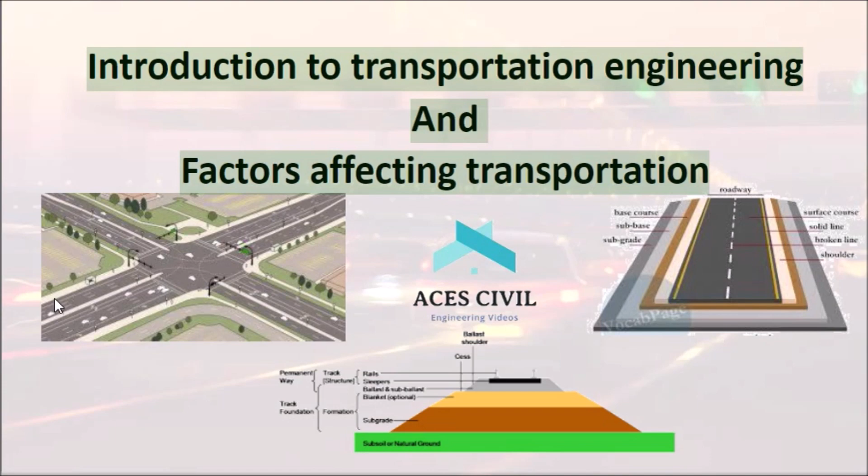Transportation plays a major role in the development of human civilization. For instance, one could easily observe the strong correlation between the evolution of human settlement and the proximity of transport facilities.

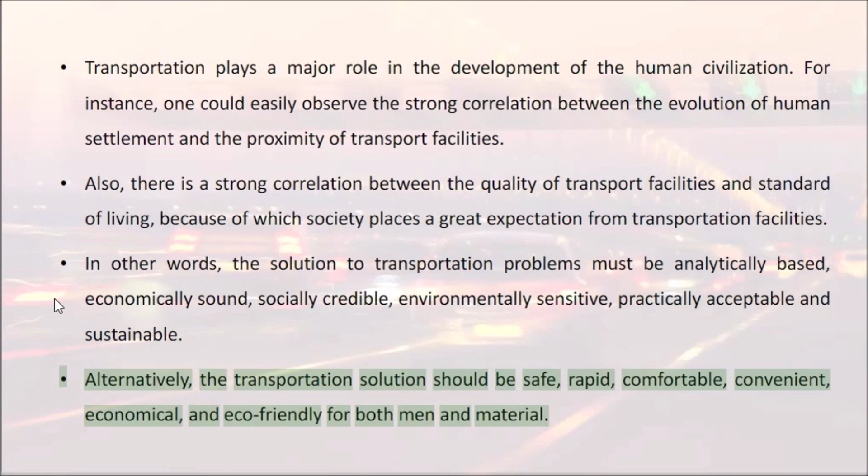Also, there is a strong correlation between the quality of transport facilities and standard of living, because of which society places great expectations from transportation facilities. In other words, the solution to transportation problems must be analytically based, economically sound, socially credible, environmentally sensitive, practically acceptable, and sustainable. Alternatively, the transportation solution should be safe, rapid, comfortable, convenient, economical, and eco-friendly for both men and material.

Transportation system: in the last couple of decades, transportation systems analysis has emerged as a recognized profession. More and more government organizations, universities, researchers, consultants, and private industrial groups around the world are becoming truly multimodal in their orientation and are adopting a systematic approach to transportation problems.

Diverse characteristics. The characteristics of transportation system that make it diverse and complex are listed below. Multimodal: covering all modes of transport - air, land, and sea - for both passenger and freight.

Multi-sector, encompassing the problems and viewpoints of government, private industry, and public. Multi-problem, ranging across a spectrum of issues that includes national and international policy, planning of regional system, the location and design of specific facilities, carrier management issues, regulatory, institutional and financial policies.

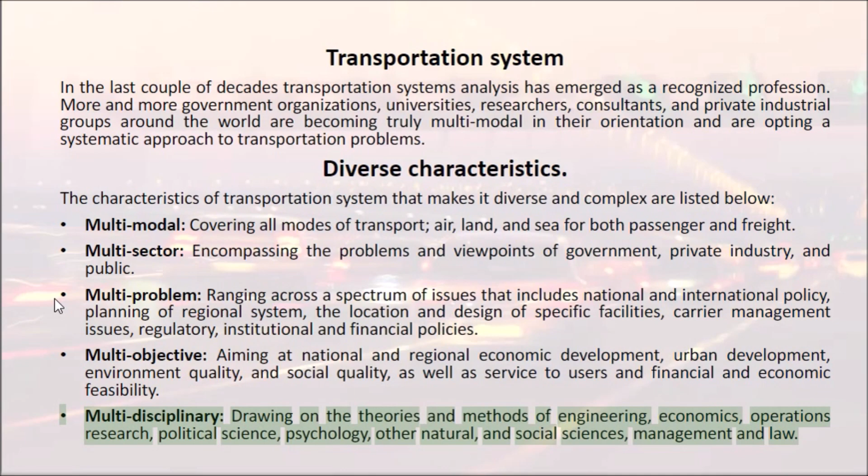Role of transportation engineer. In spite of the diversity of problem types, institutional contexts, and technical perspectives, there is an underlying unity, a body of theory and set of basic principles to be utilized in every analysis of transportation systems. The core of this is the transportation system analysis approach.

The focus of this is the interaction between the transportation and activity systems of a region. This approach is to intervene, delicately and deliberately, in the complex fabric of society to use transport effectively in coordination with other public and private actions to achieve the goals of that society.

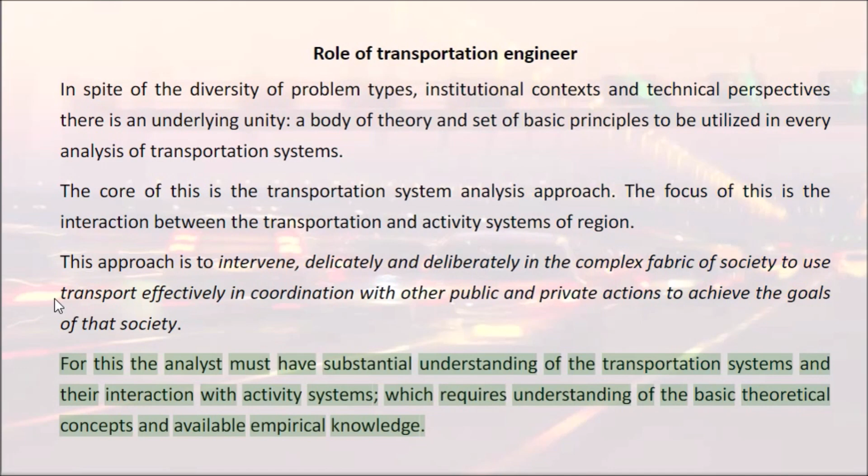For this, the analyst must have substantial understanding of the transportation systems and their interaction with activity systems, which requires understanding of the basic theoretical concepts and available empirical knowledge.

Major disciplines of transportation. Transportation engineering can be broadly divided into four major parts: transportation planning, geometric design, pavement design, and traffic engineering. A brief overview of the topics is given below.

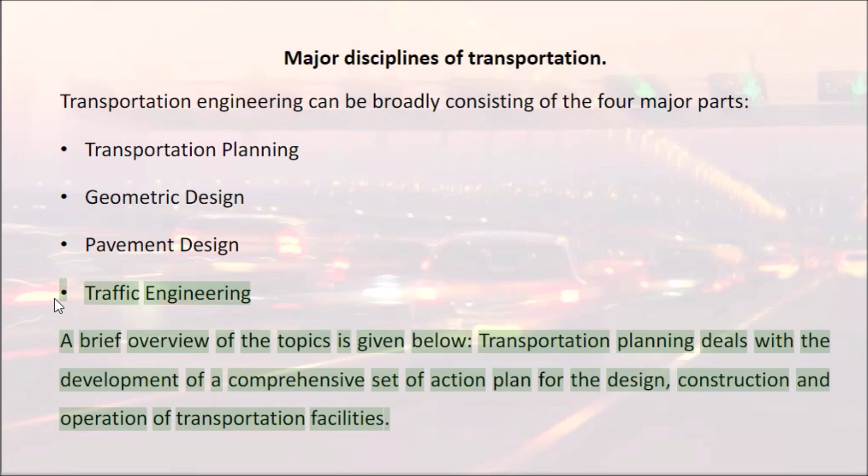Transportation planning deals with the development of a comprehensive set of action plans for the design, construction, and operation of transportation facilities. Transportation planning essentially involves the development of a transport model which will accurately represent both the current as well as future transportation system.

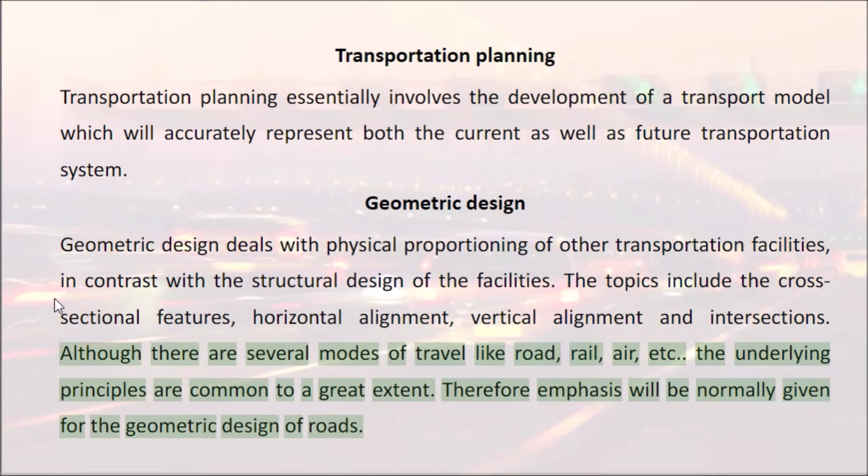Geometric design deals with physical proportioning of transportation facilities, in contrast with the structural design of the facilities. The topics include the cross-sectional features, horizontal alignment, vertical alignment, and intersections. Although there are several modes of travel like road, rail, air, etc., the underlying principles are common to a great extent. Therefore, emphasis will normally be given to the geometric design of roads.

Pavement analysis and design. Pavement design deals with the structural design of roads, both bituminous and concrete, commonly known as flexible pavements and rigid pavements, respectively. It deals with the design of paving materials, determination of the layer thickness, and construction and maintenance procedures.

The design mainly covers structural aspects, functional aspects, and drainage. Structural design ensures the pavement has enough strength to withstand the impact of loads. Functional design emphasizes the riding quality, and the drainage design protects the pavement from damage due to water infiltration.

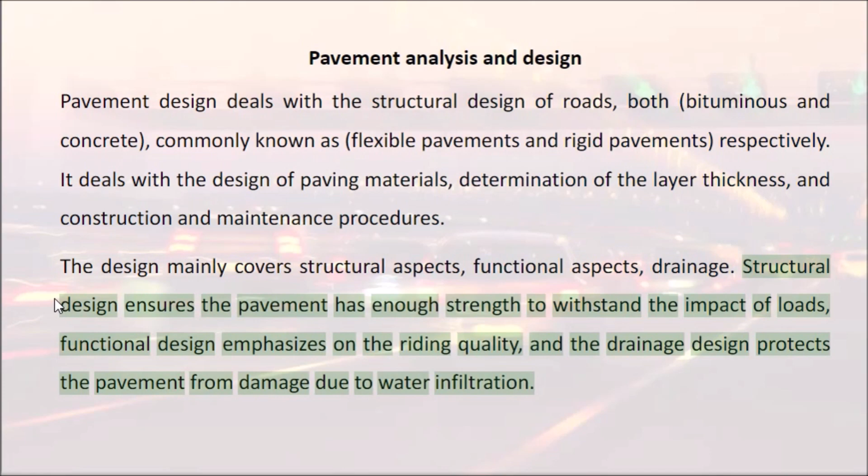Traffic engineering covers a broad range of engineering applications with a focus on the safety of the public, the efficient use of transportation resources, and the mobility of people and goods. Traffic engineering involves a variety of engineering and management skills, including design, operation, and system optimization.

In order to address the above requirement, the traffic engineer must first understand the traffic flow behavior and characteristics by extensive collection of traffic flow data and analysis. Based on this analysis, traffic flow is controlled so that the transport infrastructure is used optimally as well as with good service quality.

In short, the role of traffic engineer is to protect the environment while providing mobility, to preserve scarce resources while assuring economic activity, and to assure safety and security to people and vehicles, through both acceptable practices and high-tech communications.

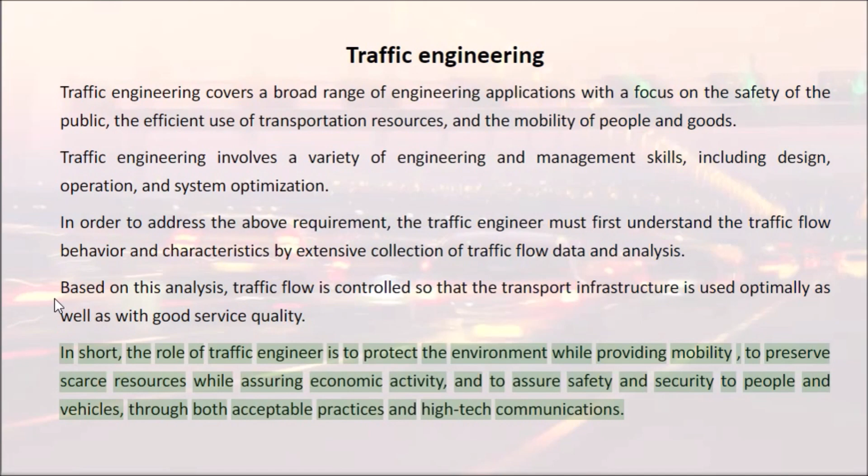Other important disciplines. In addition to the four major disciplines of transportation, there are several other important disciplines that are being evolved in the past few decades. Although it is difficult to categorize them into separate well-defined disciplines because of the significant overlap, it may be worth the effort to highlight the importance given by the transportation community. They can be enumerated as below.

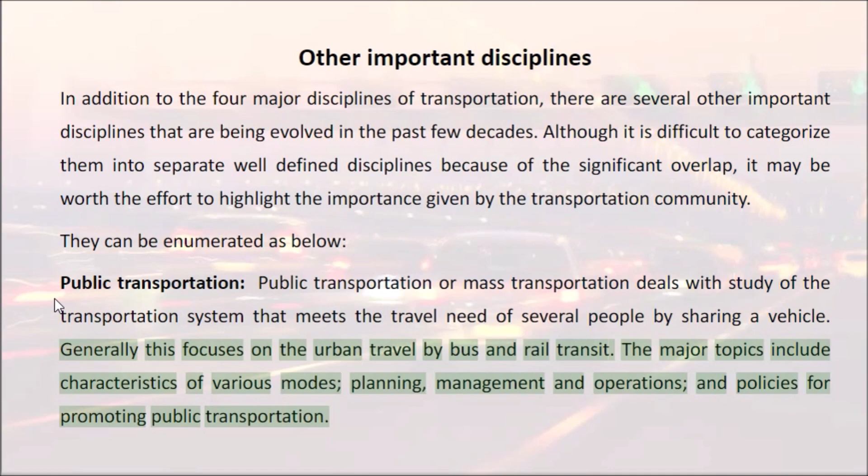Public transportation. Public transportation or mass transportation deals with the study of the transportation system that meets the travel need of several people by sharing a vehicle. Generally, this focuses on urban travel by bus and rail transit. The major topics include characteristics of various modes, planning, management, and operations, and policies for promoting public transportation.

Financial and economic analysis. Transportation facilities require large capital investments. Therefore, it is imperative that whoever invests money should get the returns. When government invests in transportation, its objective is often not monetary returns, but social benefits. The economic analysis of transportation projects tries to quantify the economic benefit, which includes saving in travel time, fuel consumption, etc. This will help the planner in evaluating various projects and to optimally allocate funds.

On the contrary, private sector investments require monetary profits from the projects. Financial evaluation tries to quantify the return from a project.

Environmental impact assessment. The depletion of fossil fuels and the degradation of the environment has been a severe concern of planners in the past few decades. Transportation, in spite of its benefits to society, is a major contributor to the above concern. The environmental impact assessment attempts in quantifying the environmental impacts and tries to evolve strategies for the mitigation and reduction of the impact due to both construction and operation. The primary impacts are fuel consumption, air pollution, and noise pollution.

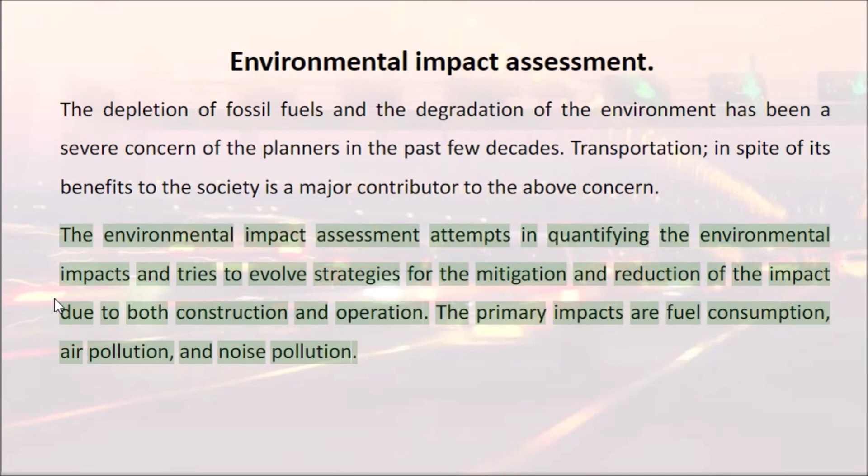Accident analysis and reduction. One of the silent killers of humanity is transportation. Several statistics evaluate that more people are killed due to transportation than great wars and natural disasters. This discipline of transportation looks at the causes of accidents, from the perspective of human, road, and vehicle, and formulates plans for the reduction.

Intelligent transport system. With the advent of computers, communication, and vehicle technology, it is possible in these days to operate transportation systems much more effectively with significant reduction in the adverse impacts of transportation. Intelligent transportation systems offer better mobility, efficiency, and safety with the help of state-of-the-art technology.

In addition, disciplines specific to various modes are also common. This includes railway engineering, port and harbor engineering, and airport engineering.

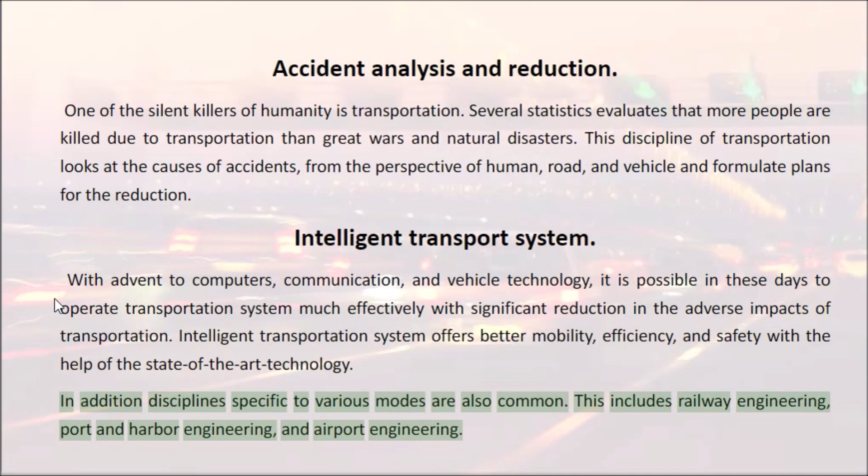Highway planning in India. Excavations at the sites of Indus Valley, Mohenjo-Daro, and Harappan civilizations revealed the existence of planned roads in India as old as 2500 to 3500 BC. The Mauryan kings also built very good roads. Ancient books like Arthashastra, written by Kautilya, a great administrator of the Mauryan times, contained rules for regulating traffic, depths of roads for various purposes, and punishments for obstructing traffic.

During the time of the Mughal period, roads in India were greatly improved. Roads linking northwest and eastern areas through the Gangetic plains were built during this time. After the fall of the Mughals and at the beginning of British rule, many existing roads were improved. The construction of the Grand Trunk Road connecting north and south is a major contribution of the British. However, the focus was later shifted to railways, except for feeder roads to important stations.

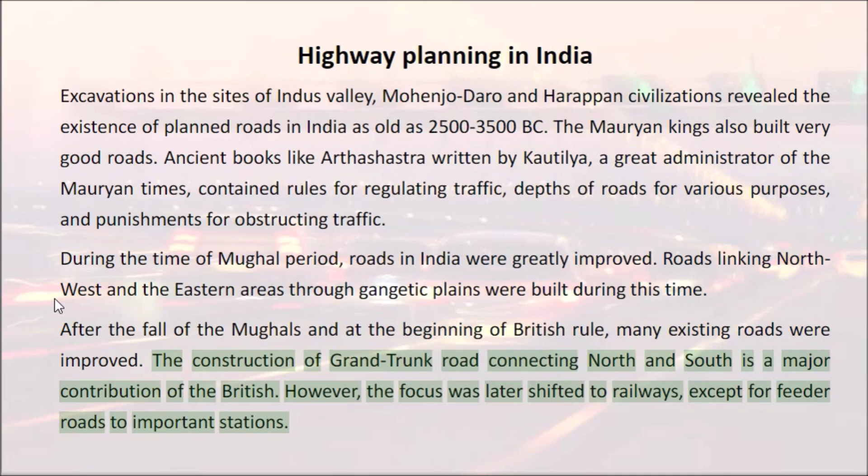Modern developments. The First World War period and that immediately following it found a rapid growth in motor transport. So the need for better roads became a necessity. For that, the Government of India appointed a committee called the Road Development Committee with Mr. M.R. Jayakar as the chairman. This committee came to be known as the Jayakar Committee.

In 1927, the Jayakar Committee for Indian Road Development was appointed. The major recommendations and the resulting implementations were: the committee found that the road development of the country has become beyond the capacity of local governments and suggested that the central government should take proper charge, considering it as a matter of national interest.

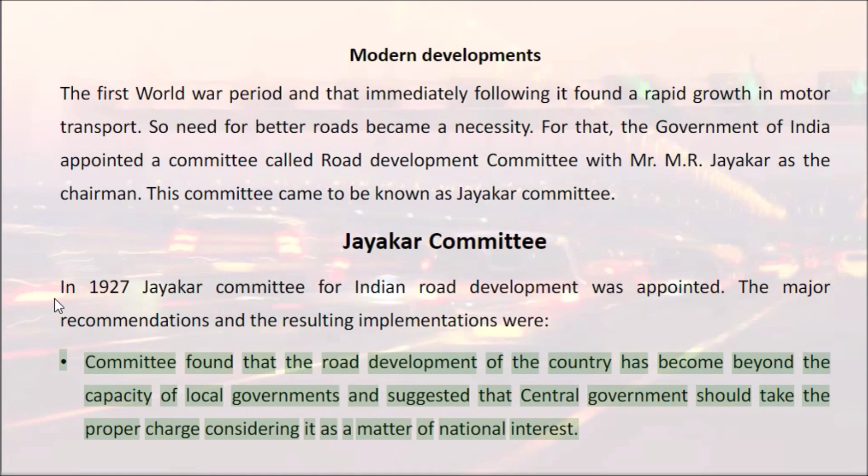They gave more stress on long-term planning, a program for a period of 20 years, hence called the 20-year plan - to formulate plans and implement those plans within the next 20 years.

One of the recommendations was the holding of periodic road conferences to discuss road construction and development. This paved the way for the establishment of a semi-official technical body called the Indian Road Congress, IRC, in 1934.

The committee suggested imposition of additional taxation on motor transport, which includes duty on motor spirit, vehicle taxation, and license fees for vehicles plying for hire. This led to the introduction of a development fund called the Central Road Fund in 1929. This fund was intended for road development.

A dedicated research organization should be constituted to carry out research and development work. This resulted in the formation of the Central Road Research Institute, CRRI, in 1950.

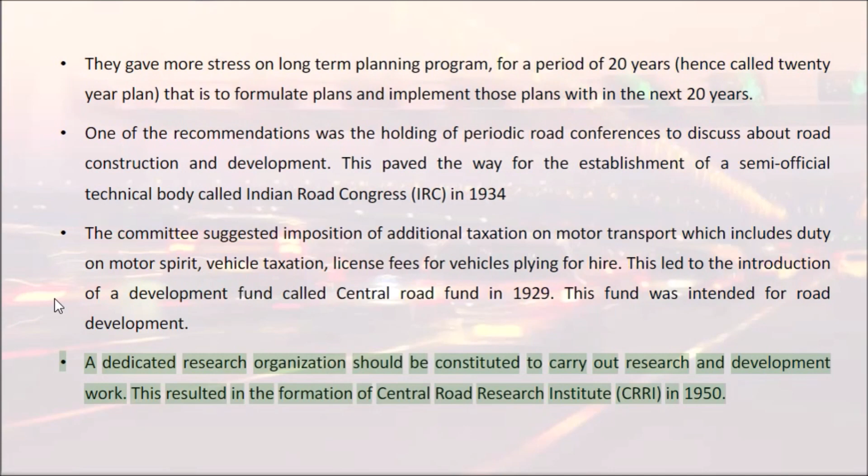Nagpur Road Congress 1943. The Second World War saw a rapid growth in road traffic, and this led to deterioration in the condition of roads. To discuss improving the condition of roads, the government convened a conference of chief engineers of provinces at Nagpur in 1943. The result of the conference is famously known as the Nagpur Plan.

A 20-year development program for the period 1943 to 1963 was finalized. It was the first attempt to prepare a coordinated road development program in a planned manner. The roads were divided into 4 classes.

National highways, which would pass through states and places having national importance for strategic, administrative, and other purposes. State highways, which would be the other main roads of a state.

District roads, which would take traffic from the main roads to the interior of the district - according to importance, some are considered major district roads and the remaining as other district roads. Village roads, which would link the villages to the road system.

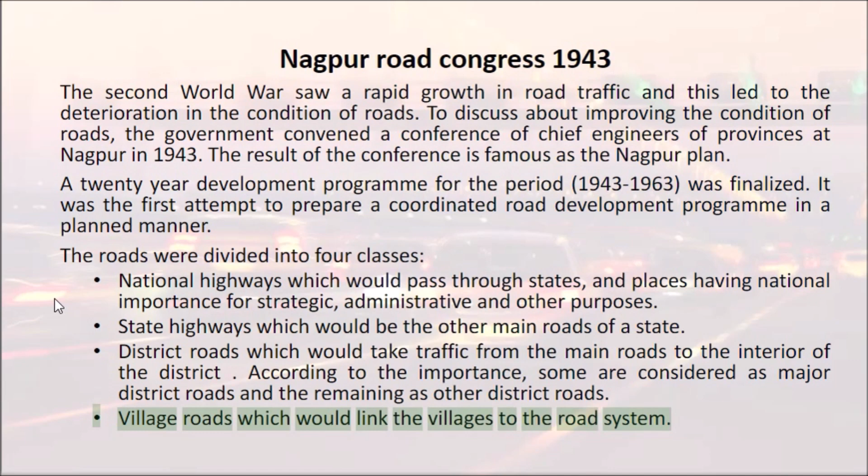The committee planned to construct 2 lakh km of road across the country within 20 years. They recommended the construction of star and grid patterns of roads throughout the country. One objective was that the road length should be increased so as to give a road density of 16 km per 100 square kilometers.

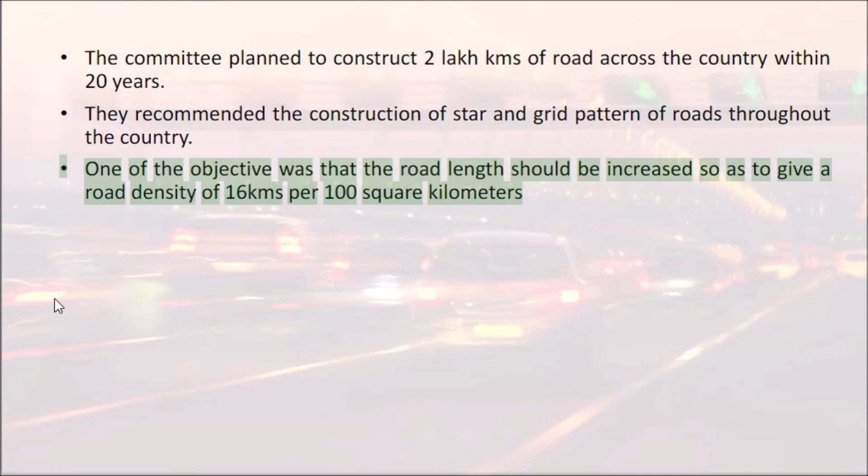Bombay Road Congress 1961. The length of roads envisaged under the Nagpur plan was achieved by the end of it, but the road system was deficient in many respects. The changed economic, industrial, and agricultural conditions in the country warranted a review of the Nagpur plan.

Accordingly, a 20-year plan was drafted by the Roads Wing of the Government of India, popularly known as the Bombay Plan. The highlights of the plan were: it was the second 20-year road plan, 1961 to 1981. The total road length targeted to construct was about 10 lakh kilometers.

Rural roads were given specific attention. Scientific methods of construction were proposed for the rural roads. The necessary technical advice to the panchayats should be given by state PWDs.

They suggested that the length of the road should be increased so as to give a road density of 32 km per 100 square kilometers. The construction of 1,600 kilometers of expressways was also included in the plan.

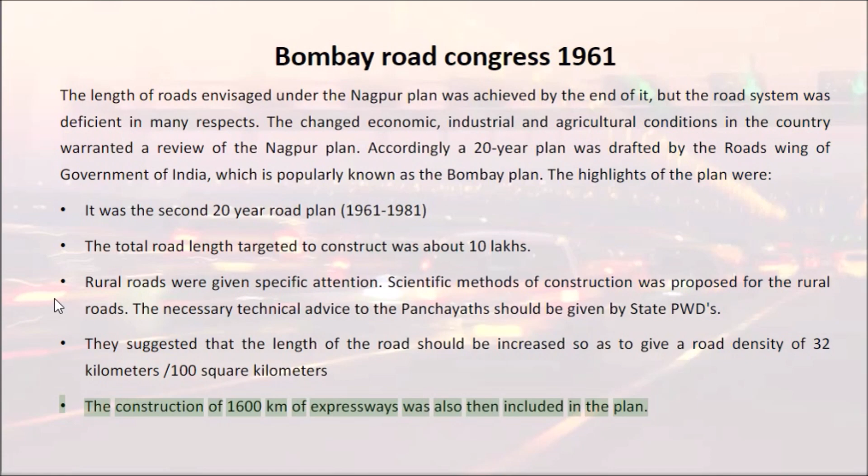Lucknow Road Congress 1984. This plan has been prepared keeping in view the growth pattern envisaged in various fields by the turn of the century. Some of the salient features of this plan are as given below.

This was the third 20-year road plan, 1981 to 2001. It is also called the Lucknow Road Plan.

It aimed at constructing a road length of 12 lakh kilometers by the year 1981, resulting in a road density of 82 km per 100 sq.km. The plan has set the target length of NH to be completed by the end of the 7th, 8th, and 9th five-year plan periods.

It aims at improving the transportation facilities in villages, towns, etc., such that no part of the country is farther than 50 km from a national highway.

One of the goals contained in the plan was that expressways should be constructed on major traffic corridors to provide speedy travel. Energy conservation, environmental quality of roads, and road safety measures were also given due importance in this plan.

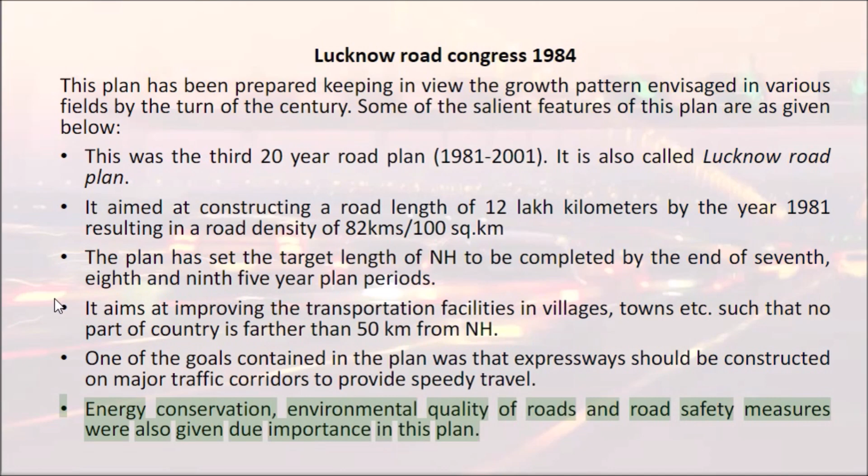Role of transportation in society. Transportation is a non-separable part of any society. It exhibits a very close relation to the style of life, the range and location of activities, and the goods and services which will be available for consumption.

Advances in transportation have made possible changes in the way of living and the way in which societies are organized, and therefore have a great influence on the development of civilizations.

Transportation is responsible for the development of civilizations from very old times by meeting the travel requirements of people and the transport requirements of goods. Such movement has changed the way people live and travel.

In developed and developing nations, a large fraction of people travel daily for work, shopping, and social reasons. But transport also consumes a lot of resources like time, fuel, materials, and land.

Economic role of transportation. Economics involves production, distribution, and consumption of goods and services.

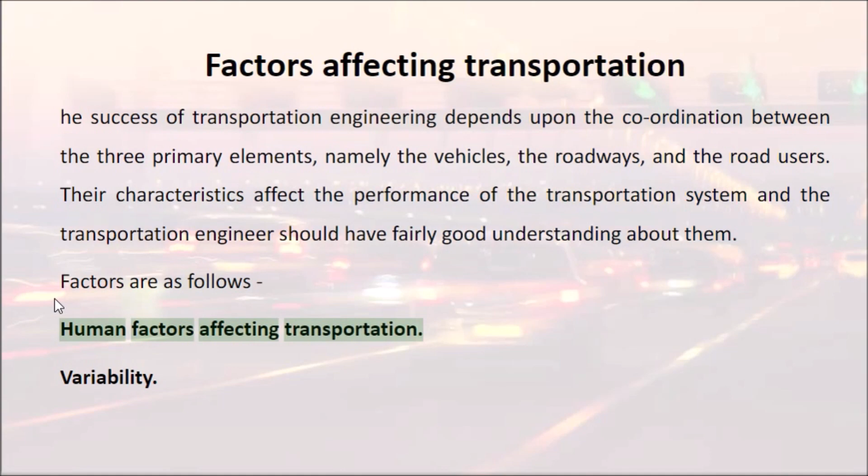Human factors affecting transportation. Road users can be defined as drivers, passengers, pedestrians, etc. who use the streets and highways. Together, they form the most complex element of the traffic system, the human element, which differentiates transportation engineering from all other engineering fields. It is said to be the most complex factor as human performance varies from individual to individual.

Thus, the transportation engineer should deal with a variety of road user characteristics. For example, a traffic signal timed to permit an average pedestrian to cross the street safely may cause a severe hazard to an elderly person. Thus, design considerations should safely and efficiently accommodate the elderly persons, the children, the handicapped, the slow and speedy, and the good and bad drivers.

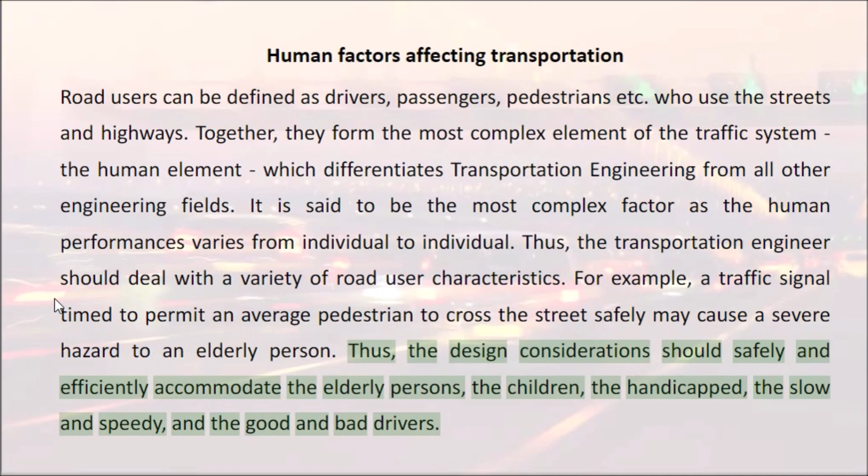Variability. The most complex problem while dealing with human characteristics is its variability. Human characteristics like ability to react to a situation, vision and hearing, and other physical and psychological factors vary from person to person and depend on age, fatigue, nature of stimuli, presence of drugs, alcohol, etc.

The influence of all these factors and the corresponding variability cannot be accounted for when a facility is designed. So a standardized value is often used as the design value. The 85th percentile value of different characteristics is taken as a standard. It represents a characteristic that 85% of the population can meet or exceed.

For example, if we say that the 85th percentile value of walking speed is about 2 meters per second, it means that 85% of people have a walking speed faster than 2 meters per second. The variability is thus fixed by selecting proper 85th percentile values of the characteristics.

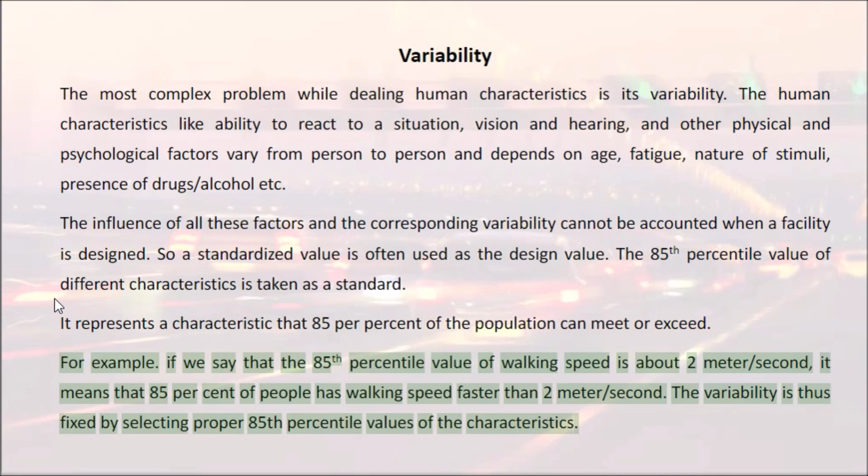Critical characteristics. The road user characteristics can be of two main types. Some of them are quantifiable, like reaction time, visual acuity, etc., while some others are less quantifiable, like the psychological factors, physical strength, fatigue, and dexterity.

Reaction time. The road user is subjected to a series of stimuli, both expected and unexpected. The time taken to perform an action according to the stimulus involves a series of stages, like perception. Perception is the process of perceiving the sensations received through the sense organs, nerves, and brain. It is actually the recognition that a stimulus on which a reaction is to happen exists.

Intellection involves the identification and understanding of stimuli. Emotion: this stage involves the judgment of the appropriate response to be made on the stimuli, like to stop, pass, move laterally, etc. Volition is the execution of the decision, which is the result of the physical actions of the driver.

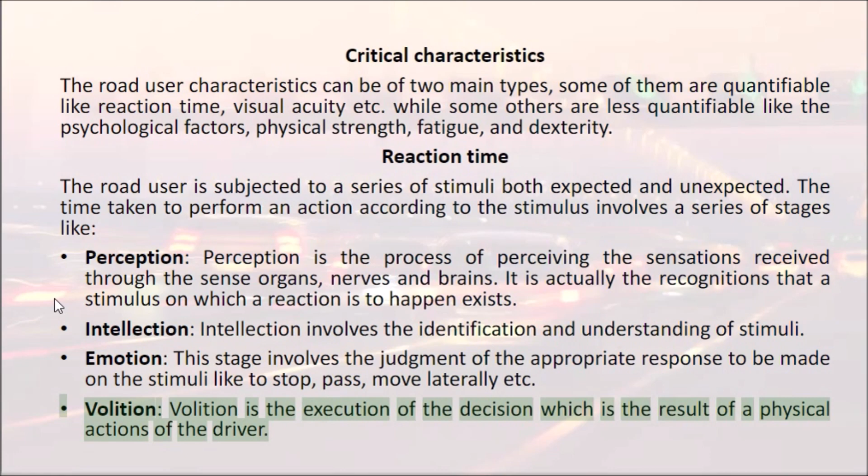For example, if a driver approaches an intersection where the signal is red, the driver first sees the signal (perception), recognizes that it is a red/stop signal, decides to stop, and finally applies the brake (volition). This sequence is called the PIEV time, or perception-reaction time.

But apart from the above time, the vehicle itself, traveling at initial speed, would require some more time to stop. That is, the vehicle traveling with initial speed u will travel a distance d equals vt, where t is the above said PIEV time. Again, the vehicle would travel some distance after the brake is applied.

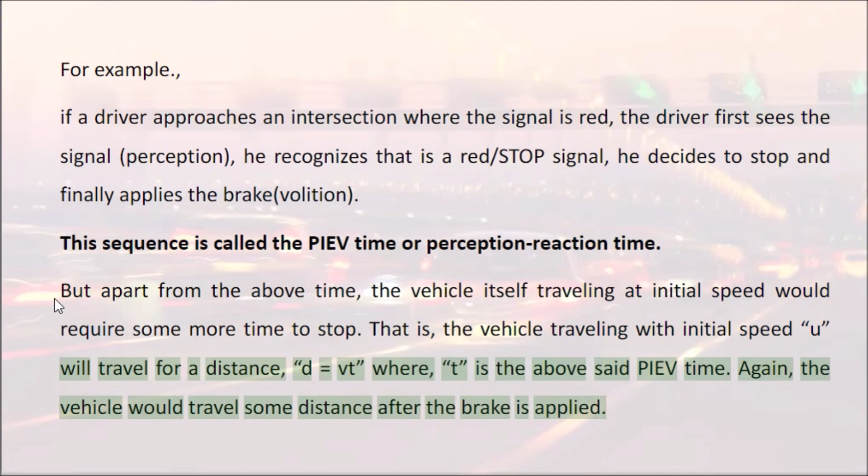Visual acuity and driving.

The perception reaction time depends greatly on the effectiveness of driver's vision in perceiving objects and traffic control measures. The PIEV time will be decreased if the vision is clear and accurate. Visual acuity relates to the field of clearest vision.

The most acute vision is within a cone of 3 to 5 degrees. Fairly clear vision within 10 to 12 degrees, and peripheral vision will be within 120 to 180 degrees.

This is important when traffic signs and signals are placed, but other factors like dynamic visual acuity, depth perception, etc. should also be considered for accurate design.

Glare vision and color vision are also equally important. Glare vision is greatly affected by age. Glare recovery time is the time required to recover from the effect of glare after the light source has passed, and will be higher for elderly persons.

Color vision is important as it can come into picture in case of sign and signal recognition.

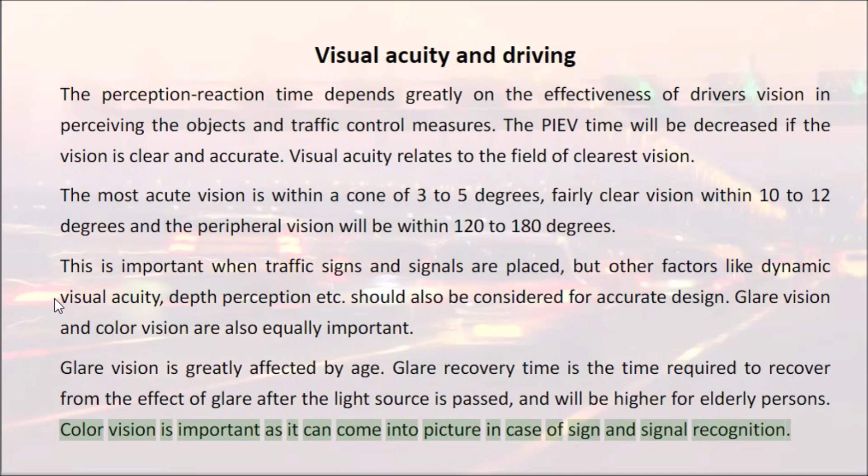Transportation planning and design will not be complete if the discussion is limited to drivers and vehicular passengers. The most prevalent of the road users are the pedestrians. Pedestrian traffic along footpaths, sidewalks, crosswalks, safety zones, islands, and over and underpasses should be considered.

On an average, the pedestrian walking speed can be taken between 1.5 m/sec to 2 m/sec. But the influence of physical, mental, and emotional factors need to be considered.

Parking spaces and facilities like signals, bus stops, and over and underpasses are to be located and designed according to the maximum distance to which the user will be willing to walk.

It was seen that in small towns 90% park within 185 m of their destinations, while only 66% park so close in a large city.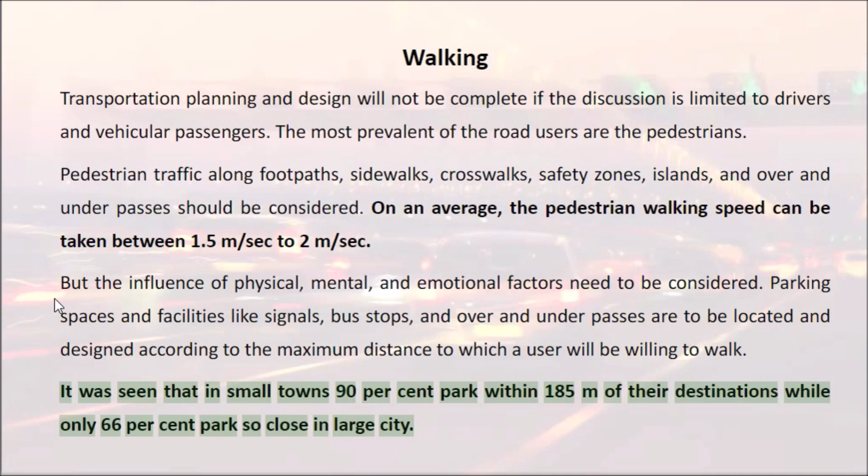Other characteristics.

Hearing is required for detecting sounds, but lack of hearing acuity can be compensated by usage of hearing aids. Lots of experiments were carried out to test driver vigilance, which is the ability of a driver to discern environmental signs over a prolonged period.

The results showed that the drivers who did not undergo any type of fatiguing conditions performed significantly better than those who were subjected to fatiguing conditions.

But mental fatigue is more dangerous than skill fatigue. The variability of attitude of drivers with respect to age, sex, knowledge and skill in driving, etc. are also important.

Two of the important constituents of the transportation system are drivers and users, passengers. Understanding of certain human characteristics like perception, reaction time, and visual acuity and their variability are to be considered by the traffic engineer.

Because of the variability in characteristics, the 85th percentile values of the human characteristics are fixed as standards for design of traffic facilities.

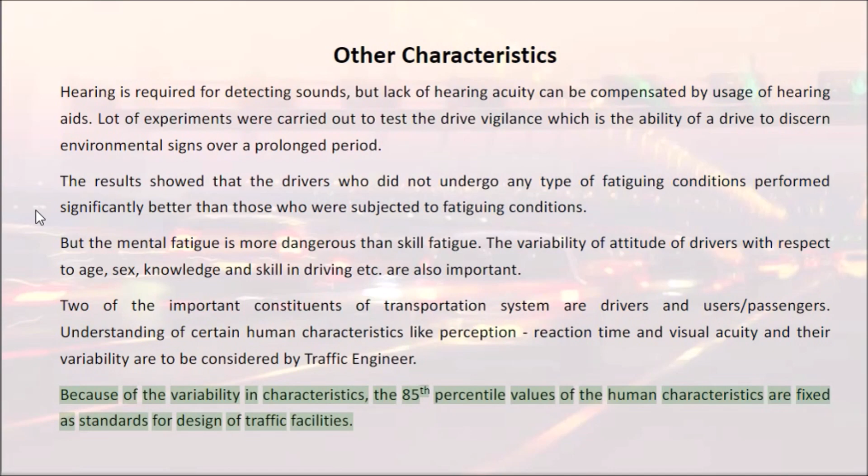Vehicle factors. It is important to know about the vehicle characteristics because we can design a road for any vehicle but not for an indefinite one. The road should be such that it should cater to the needs of existing and anticipated vehicles.

Some of the vehicle factors that affect transportation are discussed below.

Design vehicles. Vehicle dimensions. Weight, axle configuration, etc. Turning radius and turning path.

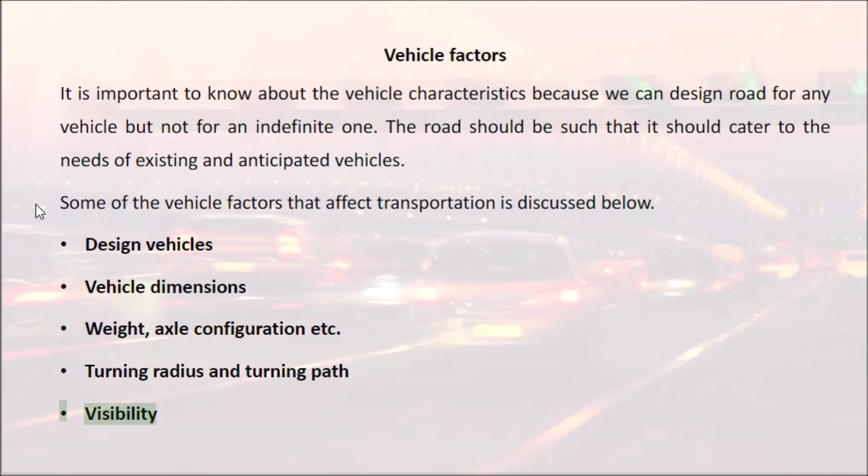Visibility. Design vehicles.

Highway systems accommodate a wide variety of sizes and types of vehicles, from the smallest compact passenger cars to the largest double and triple tractor-trailer combinations.

According to the different geometric features of highways like lane width, lane widening on curves, minimum curb and corner radius, clearance heights, etc., some standard physical dimensions for the vehicles have been recommended.

Road authorities are forced to impose limits on vehicular characteristics mainly to provide practical limits for road designers to work, to see that the road space and geometry is available to normal vehicles, and to implement traffic control effectively and efficiently,

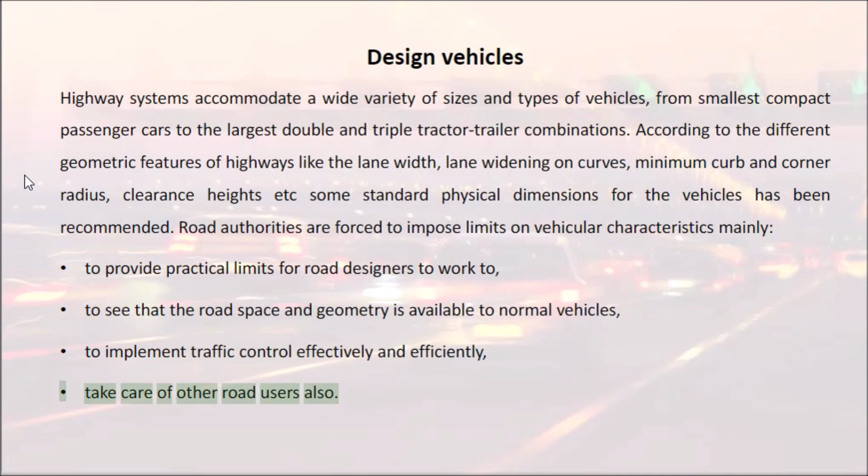and take care of other road users also.

Taking the above points into consideration, in general, vehicles can be grouped into motorized two-wheelers, motorized three-wheelers, passenger cars, buses, single-axle trucks, multi-axle trucks, truck-trailer combinations, and slow non-motorized vehicles.

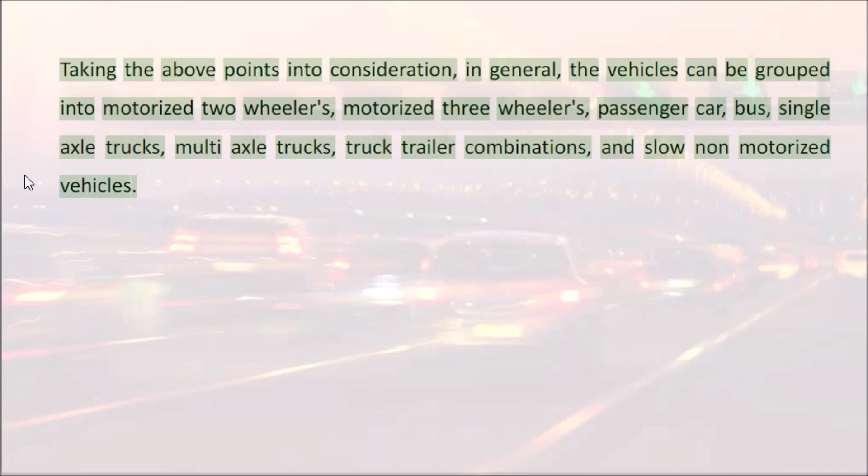Vehicle dimensions. The vehicular dimensions which can affect road and traffic design are mainly width, height, length, rear overhang, and ground clearance. The width of the vehicle affects the width of lanes, shoulders, and parking facility.

The capacity of the road will also decrease if the width exceeds the design values. The height of the vehicle affects the clearance height of structures like over bridges, under bridges, electric and other service lines, and also the placing of signs and signals.

Another important factor is the length of the vehicle, which affects the extra width of pavement, minimum turning radius, safe overtaking distance, capacity, and parking facility.

The rear overhang control is mainly important when the vehicle takes a right or left turn from a stationary point. The ground clearance of a vehicle comes into picture while designing ramps and property access, as bottoming out on a crest can stop a vehicle from moving under its own pulling power.

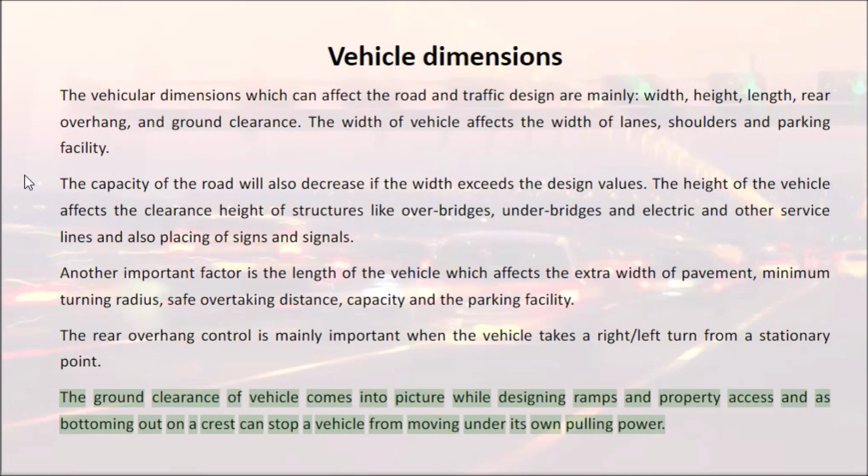Weight, axle configuration, etc. The weight of the vehicle is a major consideration during the design of pavements, both flexible and rigid. The weight of the vehicle is transferred to the pavement through the axles, and so the design parameters are fixed on the basis of the number of axles.

The power-to-weight ratio is a measure of the ease with which a vehicle can move. It determines the operating efficiency of vehicles on the road. The ratio is more important for heavy vehicles. The power-to-weight ratio is the major criteria which determines the length to which a positive gradient can be permitted, taking into consideration the case of heavy vehicles.

Turning radius and turning path. The minimum turning radius is dependent on the design and class of the vehicle. The effective width of the vehicle is increased on a turning. This is also important at an intersection, roundabout, terminals, and parking areas.

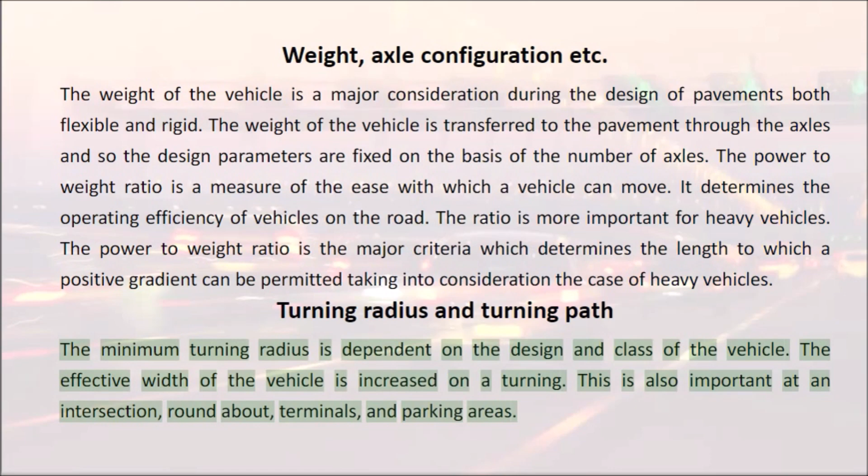Visibility. The visibility of the driver is influenced by the vehicular dimensions. As far as forward visibility is concerned, the dimension of the vehicle and the slope and curvature of windscreens, windscreen wipers, door pillars, etc. should be such that visibility is clear even in bad weather conditions like fog, ice, and rain. It should not mask the pedestrians, cyclists, or other vehicles.

During intersection maneuvers, equally important is the side and rear visibility when maneuvering, especially at intersections when the driver adjusts his speed in order to merge or cross a traffic stream. Rear vision efficiency can be achieved by properly positioning the internal or external mirrors.

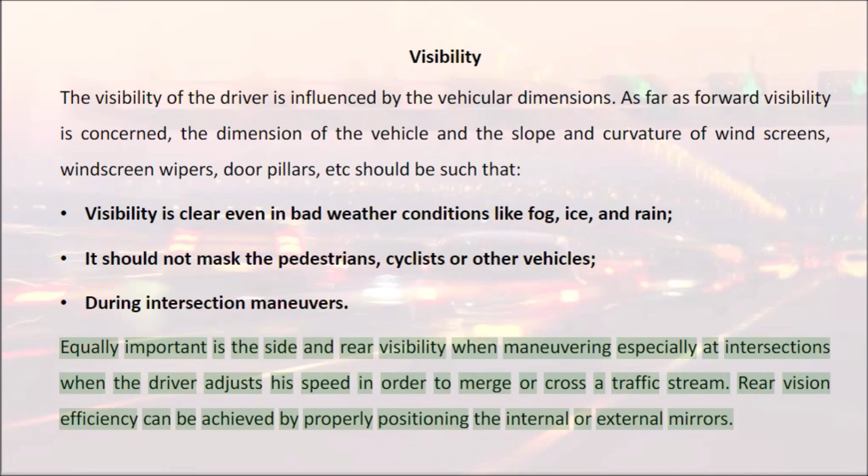Acceleration characteristics. The acceleration capacity of a vehicle is dependent on its mass, the resistance to motion, and available power. In general, the acceleration rates are highest at low speeds and decrease as speed increases. Heavier vehicles have lower rates of acceleration than passenger cars. The difference in acceleration rates becomes significant in mixed traffic streams.

For example, heavy vehicles like trucks will delay all passengers at an intersection. Again, the gaps formed can be occupied by other smaller vehicles only if they are given the opportunity to pass. The presence of upgrades makes the problem more severe.

Trucks are forced to decelerate on grades because their power is not sufficient to maintain their desired speed. As trucks slow down on grades, long gaps will be formed in the traffic stream which cannot be efficiently filled by normal passing maneuvers.

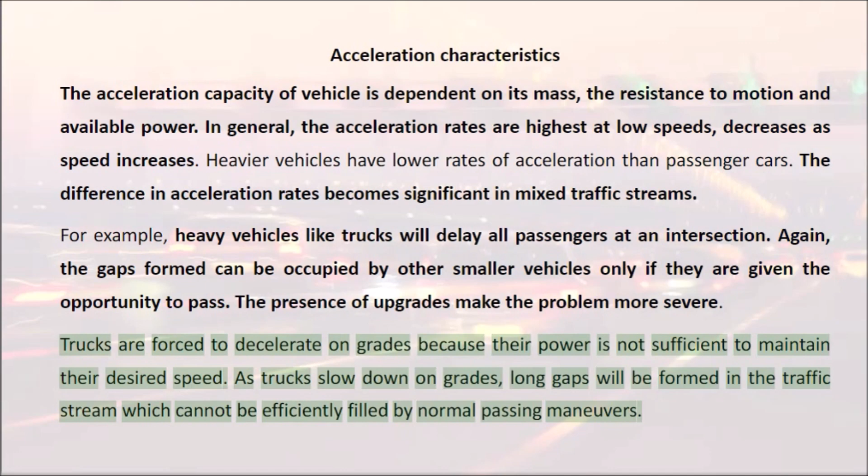Braking performance. As far as highway safety is concerned, the braking performance and deceleration characteristics of vehicles are of prime importance. The time and distance taken to stop the vehicle is very important as far as the design of various traffic facilities are concerned. The factors on which the braking distance depends are the type of the road and its condition, the type and condition of tire, and type of braking system.

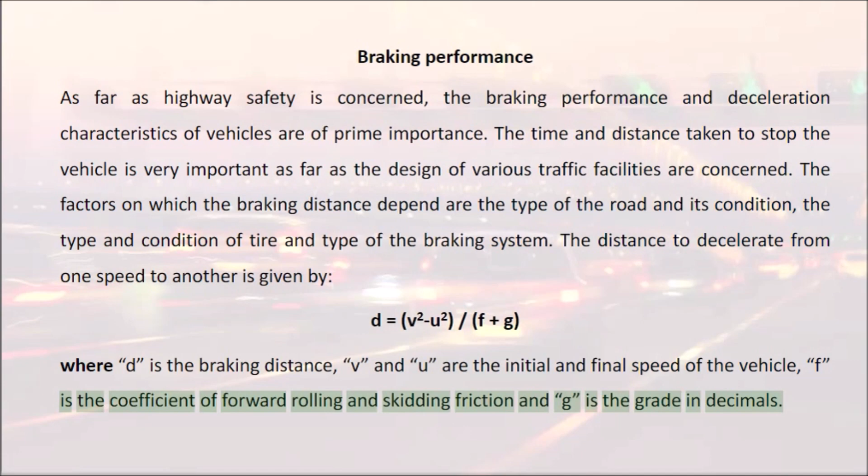The distance to decelerate from one speed to another is given by D equals V squared minus U squared, over F plus G, where D is the braking distance, V and U are the initial and final speed of the vehicle, F is the coefficient of forward rolling and skidding friction, and G is the grade in decimals.

The main characteristics of a traffic system influenced by braking and deceleration performance are: safe stopping sight distance. The minimum stopping sight distance includes both the reaction time and the distance covered in stopping. Thus, the driver should see the obstruction in time to react to the situation and stop the vehicle.

Clearance and change interval. The clearance and change intervals are again related to safe stopping distance. All vehicles at a distance further away than one stopping sight distance from the signal when the yellow is flashed is assumed to be able to stop safely. Such a vehicle which is at a distance equal to or greater than the stopping sight distance will have to travel a distance equal to the stopping sight distance plus the width of the street, plus the length of the vehicle. Thus the yellow and all-red times should be calculated to accommodate the safe clearance of those vehicles.

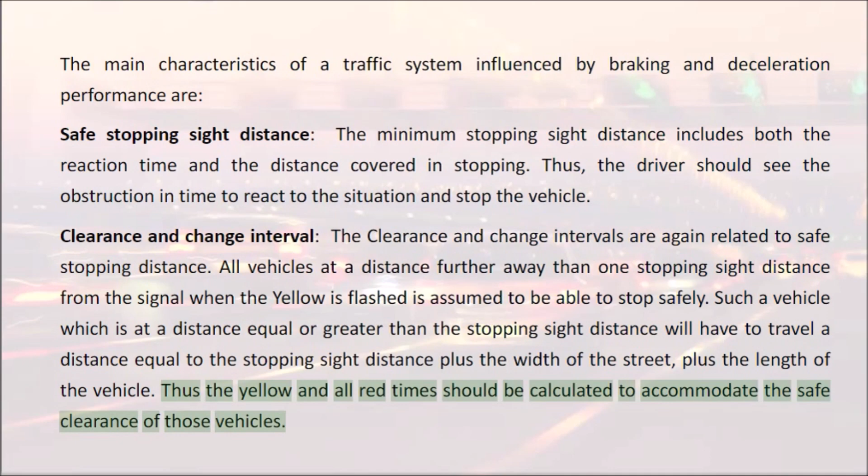Sign placement. The placement of signs again depends upon the stopping sight distance and reaction time of drivers. The driver should see the signboard from a distance at least equal to or greater than the stopping sight distance.

From the examples discussed above, it is clear that the braking and reaction distance computations are very important as far as a transportation system is concerned. Stopping sight distance is a product of the characteristics of the driver, the vehicle, and the roadway, and so this can vary with drivers and vehicles. Here the concept of design vehicles gains importance as they assist in general design of traffic facilities, thereby enhancing the safety and performance of roadways.

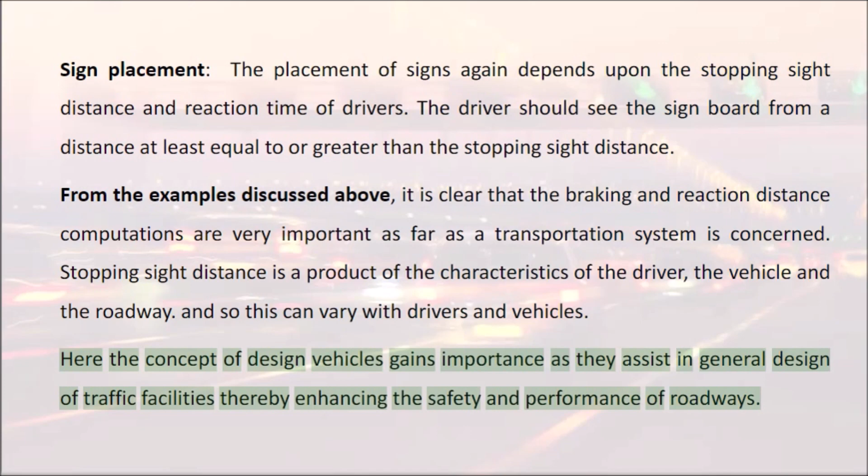Road factors. Road surface. The type of pavement is determined by the volume and composition of traffic, the availability of materials, and available funds. Some of the factors relating to road surface, like road roughness, tire wear, tractive resistance, noise, light reflection, electrostatic properties, etc., should be given special attention in the design, construction, and maintenance of highways for their safe and economical operation. Unfortunately, it is impossible to build a road surface which will provide the best possible performance for all these conditions.

For heavy traffic volumes, a smooth riding surface with good all-weather anti-skid properties is desirable. The surface should be chosen to retain these qualities so that maintenance cost and interference to traffic operations are kept to a minimum.

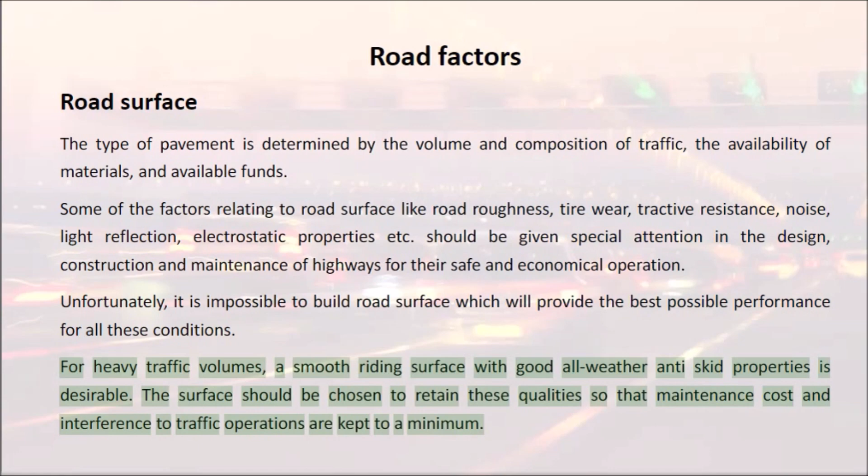Lighting. Illumination is used to illuminate the physical features of the roadway and to aid in the driving task. A luminaire is a complete lighting device that distributes light into patterns much as a garden hose nozzle distributes water. Proper distribution of the light flux from luminaires is one of the essential factors in efficient roadway lighting.

It is important that roadway lighting be planned on the basis of many traffic information such as night vehicular traffic, pedestrian volumes, and accident experience.

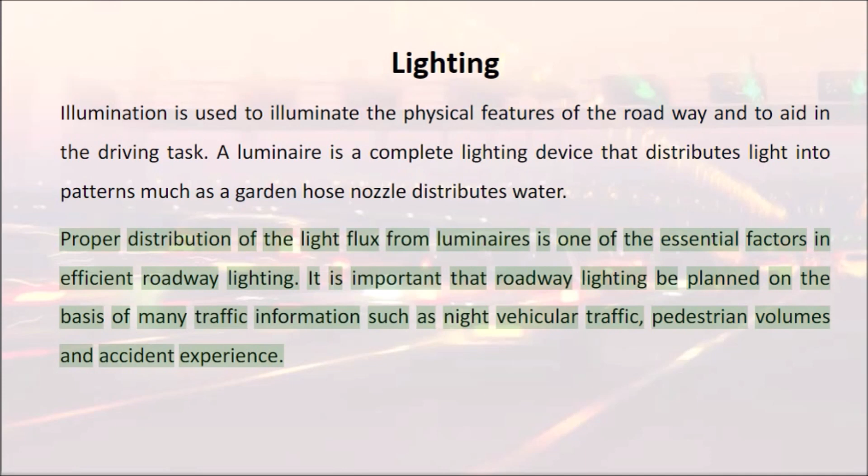Roughness. This is one of the main factors that an engineer should give importance during the design, construction, and maintenance of a highway system. Drivers tend to seek smoother surface when given a choice.

On 4-lane highways where the texture of the surface of the inner lane is rougher than that of the outside lane, passing vehicles tend to return to the outside lane after execution of the passing maneuver.

Shoulders or even speed change lanes may be deliberately roughened as a means of delineation.

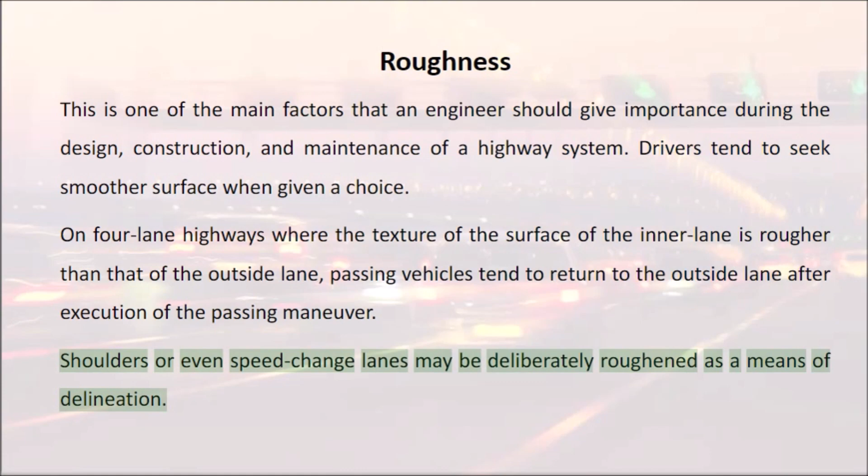Pavement colors. When the pavements are light-colored, for example, cement concrete pavements, there is better visibility during daytime, whereas during night, dark-colored pavements like bituminous pavements provide more visibility.

Contrasting pavements may be used to indicate preferential use of traffic lanes. A driver tends to follow the same pavement color having driven some distance on a light or dark surface. He expects to remain on a surface of that same color until he arrives at a major junction point.

Night visibility. Since most accidents occur at night because of reduced visibility, the traffic designer must strive to improve nighttime visibility in every way he can. An important factor is the amount of light which is reflected by the road surface to the driver's eyes. Glare caused by the reflection of oncoming vehicles is negligible on a dry pavement but is an important factor when the pavement is wet.

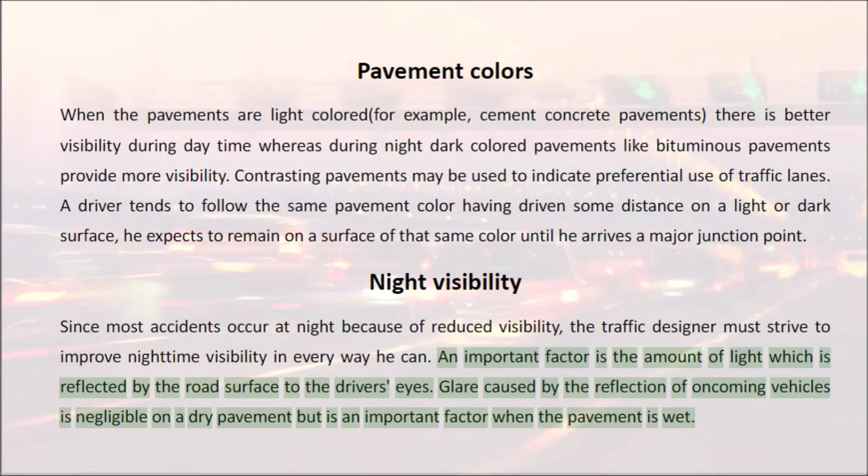Geometric aspects. The roadway elements such as pavement slope, gradient, right-of-way, etc. affect transportation in various ways. The central portion of the pavement is slightly raised and sloped to either side so as to prevent the ponding of water on the road surface. This will deteriorate the riding quality since the pavement will be subjected to many failures like potholes, etc.

Minimum lane width should be provided to reduce the chances of accidents. Also, the speed of the vehicles will be reduced and the time consumed to reach the destination will also be more.

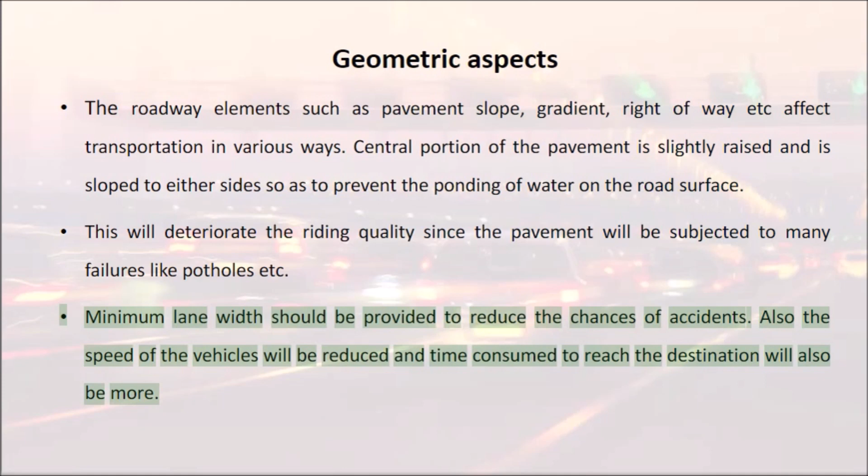Right-of-way width should be properly provided. If the right-of-way width becomes less, future expansion will become difficult and the development of that area will be adversely affected.

One important other road element is the gradient. It reduces the tractive effort of large vehicles. Again, the fuel consumption of the vehicles climbing a gradient is more.

The other road element that cannot be avoided is curves. Near curves, chances of accidents are more. Speed of the vehicles is also affected.